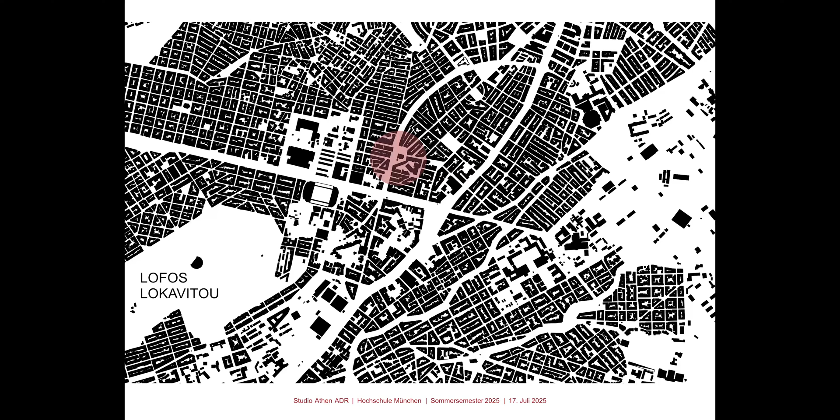We're in Ambelokipi, Athens, a dense, vibrant neighborhood full of life, traffic, and diverse communities. At its center stands the Church of St. Demetrios, surrounded by a fragmented square that, despite its potential, lacks structure, identity, and meaningful public life. This analysis explores how the space can better support everyday rhythms, offering a new reading of the square as both

a functional urban setting and a reflection of local culture. Rather than focusing solely on physical form, we looked at how people move, gather, and live within it. Framed by busy roads and smaller streets, the square feels enclosed, with movement shaped by clear axes and multiple entry points. While tree cover, active edges, and the church bring character, issues like neglected green areas, steep slopes, and a lack of shade or water limit its usability and comfort.

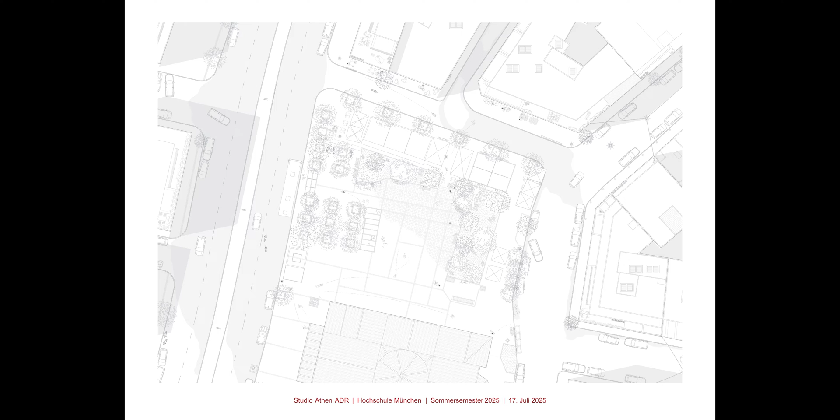Our intervention reconfigures the square as the social heart of the neighborhood, by introducing a clear spatial strategy that divides the site into distinct yet interrelated zones, each addressing different urban and social needs. Central to this was the concept of a modern agora, a multifunctional public space where social, commercial, and spiritual activities come together within a unified framework. We designed the square as a living hub, blending markets, gathering spots, and places for reflection into one interconnected whole.

At the core of this vision is the ancient aqueduct buried beneath the site. By uncovering and giving it spatial presence, we revive a forgotten part of the city's memory and reconnect the square to natural water flow, climate rhythms, and shared history.

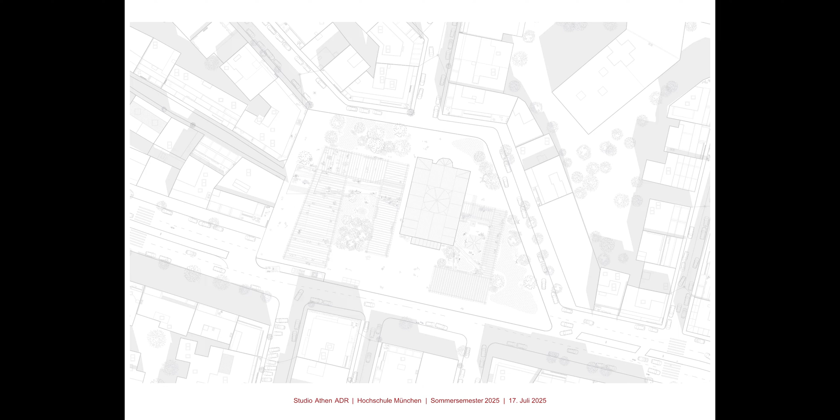Additionally, we extended the street edge to create a wider, more open buffer zone that softens the transition from the busy road to the private and communicative square, enhancing comfort and accessibility. This approach weaves history and contemporary life together, crafting a vibrant social core for the community.

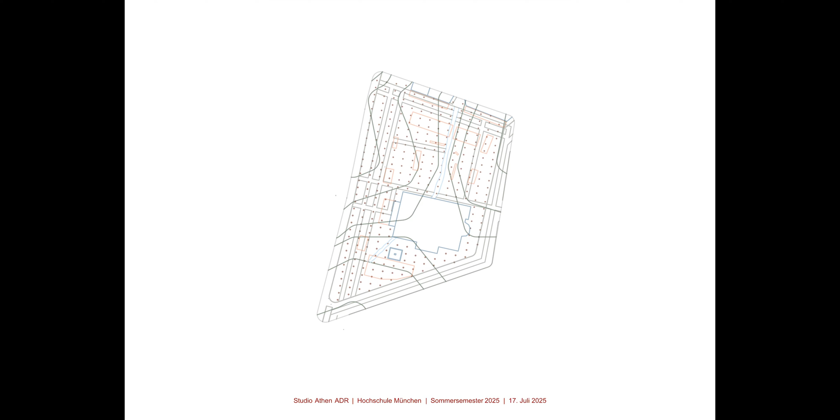The square is conceived as a system of layers ranging from infrastructure to atmosphere, working together to form a unified yet diverse public space. At its base, a structural grid emerges from the existing trees, acting as a natural framework that organizes spatial relationships and allows for flexible use.

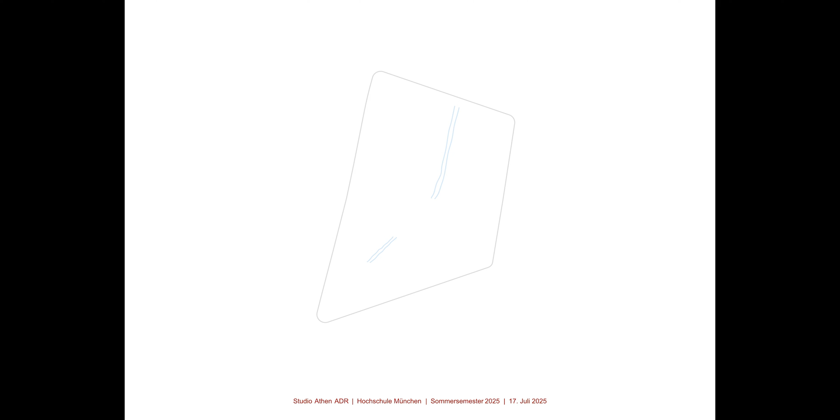Cutting across this order is the aqueduct, a diagonal fluid element shaped by topography. By tracing and revealing its path, we create a strong spatial and historical focal point, around which new gathering spaces form, guided by subtle elevation shifts and flowing contours.

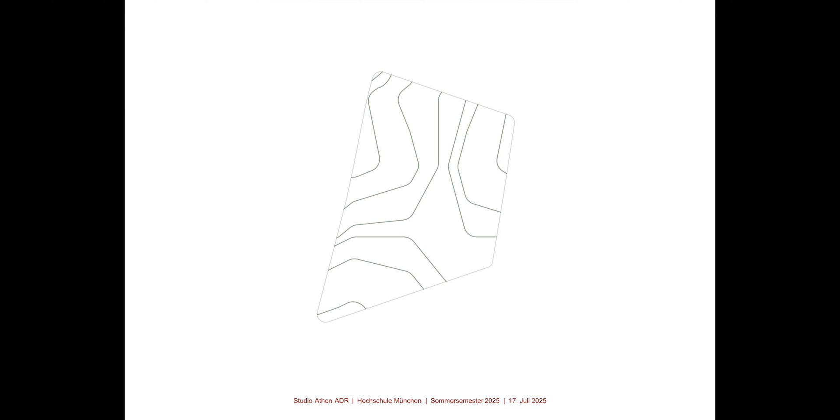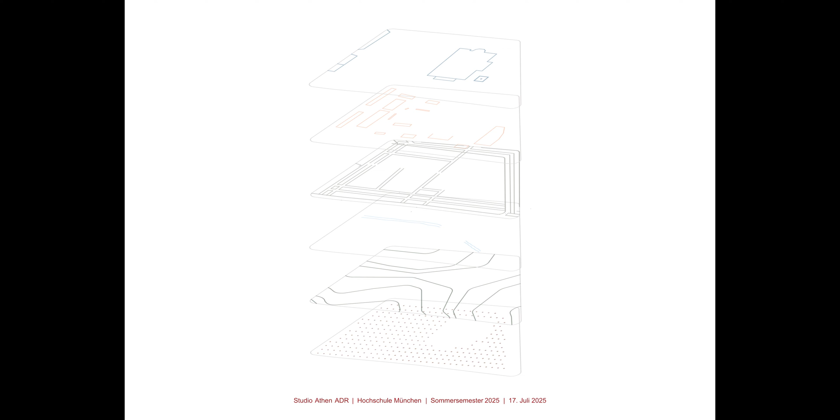Layered above are systems of movement and visitor gathering spaces, each responding to human rhythms, site conditions, and environmental needs. Movement follows everyday patterns, while key anchors such as the church, bell tower, and aqueduct basin provide orientation and meaning. Together, these layered systems create a dynamic urban field, structured yet open, defined but adaptable, a square that gathers around its history, flows with the terrain, and supports the life of the city.

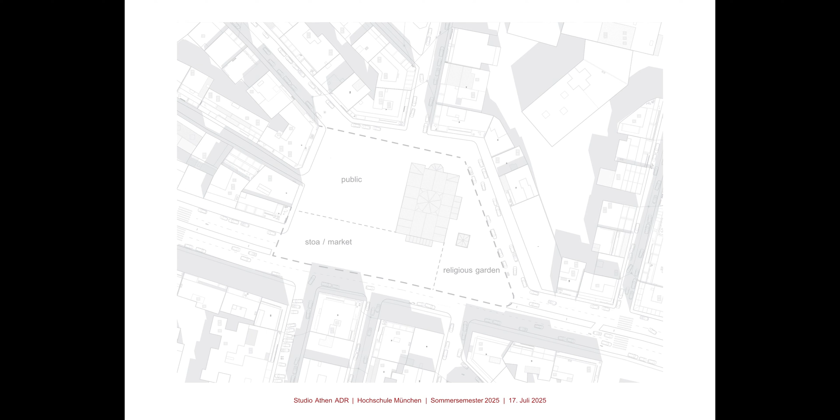Our spatial strategy takes inspiration from the ancient agora, a civic space layered with the sacred, the social, the commercial, and the everyday. We reinterpret this not as nostalgia, but as a flexible contemporary framework, with zones that echo the stoa, the garden, the market, and the gathering.

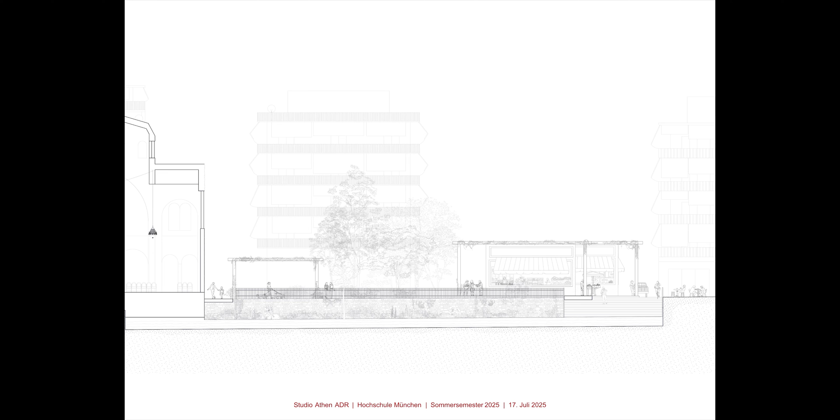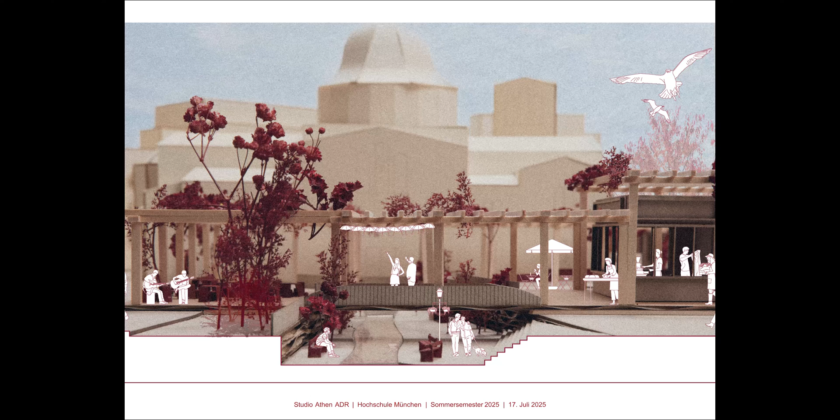The water gathering zone: at the square's lowest topographical point, we carved the ground two meters deep to expose the ancient aqueduct, creating a new public gathering space centered on running water and lush vegetation. Sunken below the rest of the square, this space naturally cools by sinking into the earth, while dense planting, a flowing water stream, and passive air trapping techniques keep it significantly cooler, especially during hot Athenian summers. This isn't just symbolic. It actively improves air circulation and invites people to pause, gather, and enjoy a comfortable microclimate.

The market hall: to the north, we placed a semi-open food market designed for daily rhythm. Morning deliveries happen from the service side while the front opens to the square. The tall roof allows for airflow and solar protection, adapting from AM to PM use.

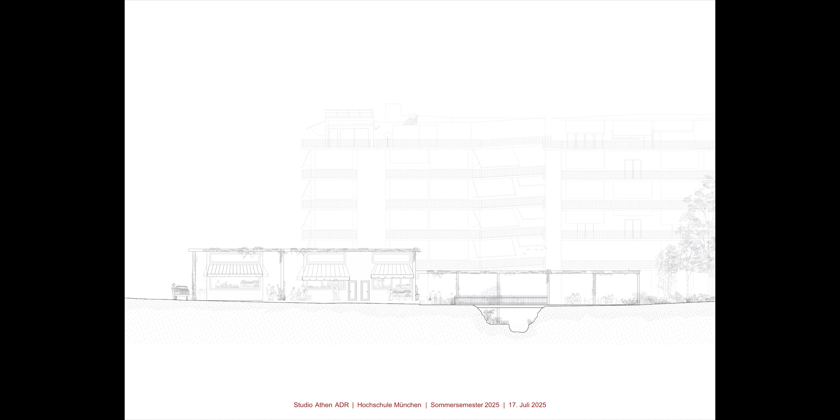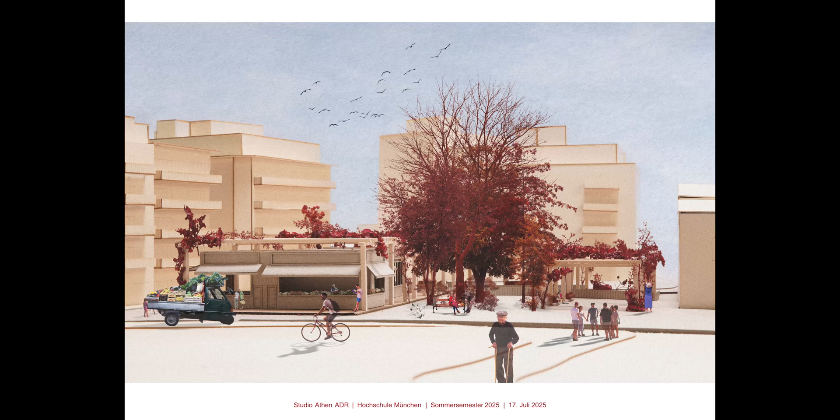Delivery and access: the delivery and parking zone is oriented along the street at the top edge of the site, creating a clear backside for the market hall. This urban logic separates visitor entrances from logistical functions, maintaining smooth operation and public flow. We elevated the market hall slightly to enhance its visibility, anchor it as a central landmark, and create a subtle spatial distinction between vibrant and quieter zones of the square.

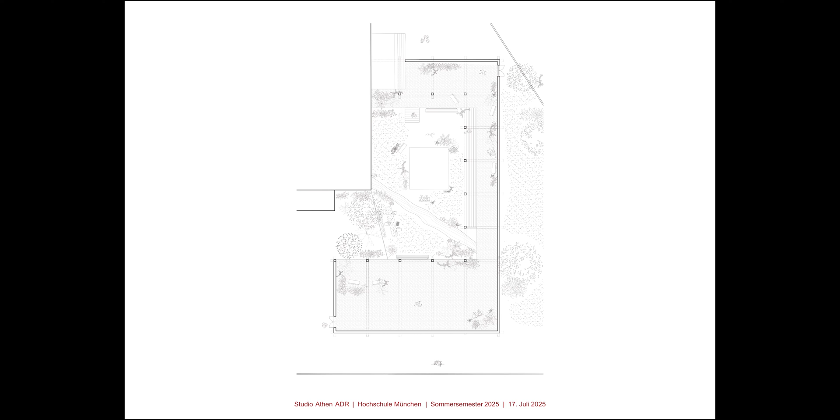The religious garden: next to the church, we created a closed, shaded garden, an outdoor room for quiet reflection. It respects Orthodox tradition by extending spiritual life beyond the church walls. We preserved the small plaza in front of the church as an open threshold, a space for arrival, pause, and reflection. This forecourt marks a clear yet gentle boundary between the civic life of the square and the spiritual calm of the church, keeping its symbolic openness and reinforcing its role as a neighborhood landmark.

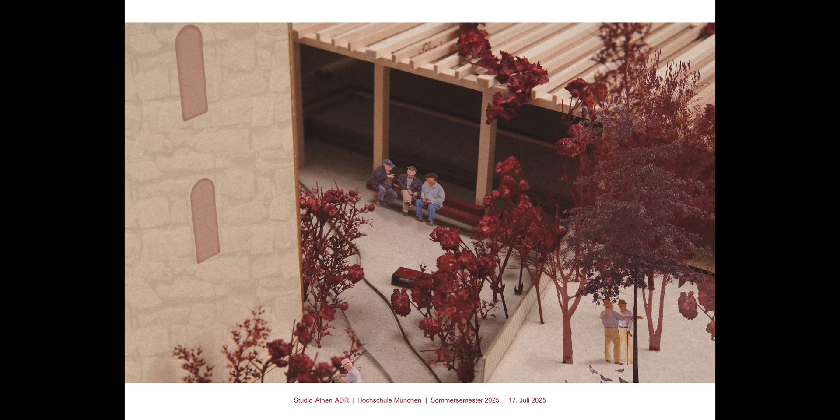Directly adjacent, we introduced a quiet, shaded garden, a planted outdoor room for spiritual retreat. Enclosed and intimate, this space extends the sacred atmosphere beyond the church walls, in line with Orthodox tradition. It offers a space for rest, contemplation, and ritual, a calm buffer between the city and the sacred.

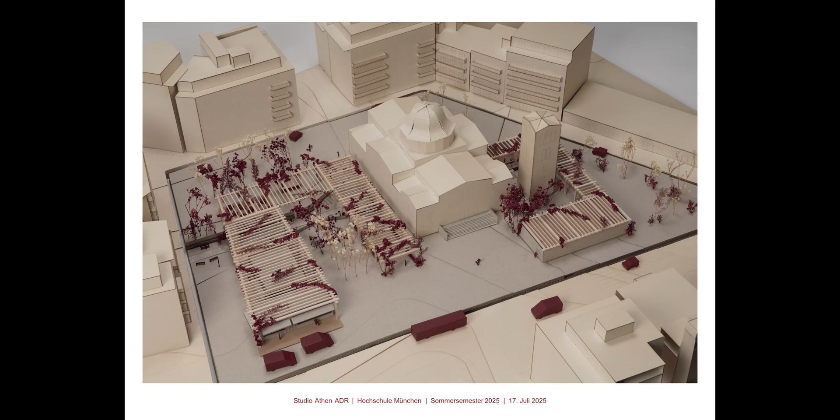We introduced a lightweight wooden structure that stretches across key parts of the square, creating shaded zones for rest, gathering, and movement. Its open framework supports climbing plants and blends with the trees, offering seasonal shade and a breathable, tactile environment. Built entirely from natural wood, the structure is soft, warm, and adaptable, enhancing comfort while remaining understated within the urban landscape.

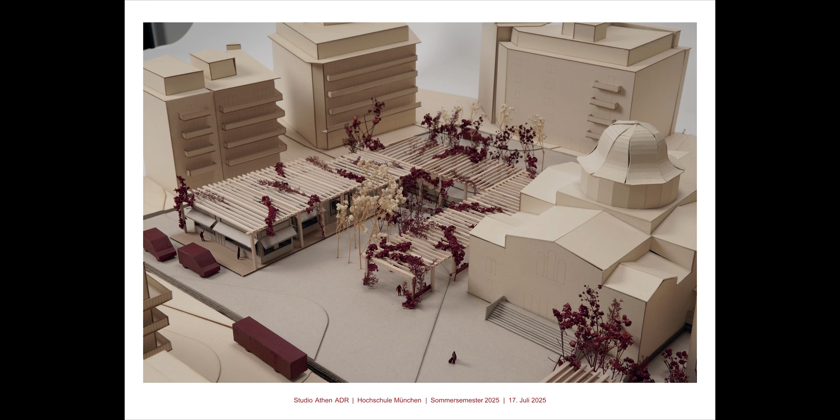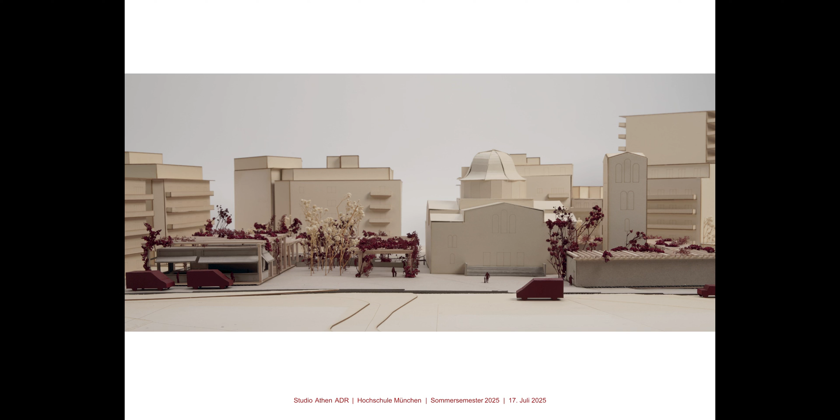This is no longer a leftover space. It becomes a living square for memory, commerce, spirituality, and daily life. Not just objects placed in space, but a choreography of relationships. The aqueduct is no longer buried. It becomes presence. Architecture is not loud, it's atmospheric, supportive. We ask, what kind of public space does a neighborhood truly need? Our answer: a place to return, to gather, to remember.